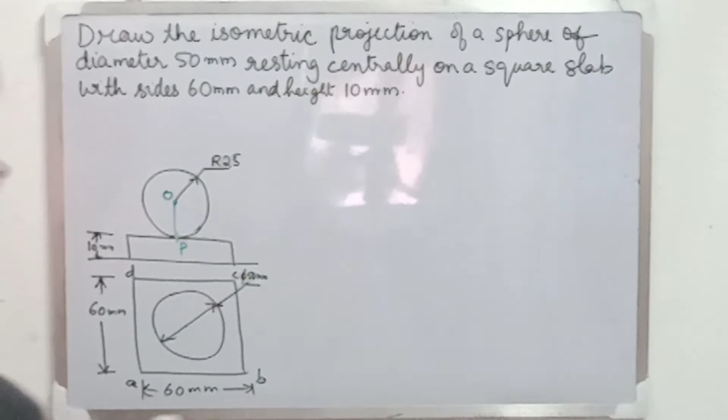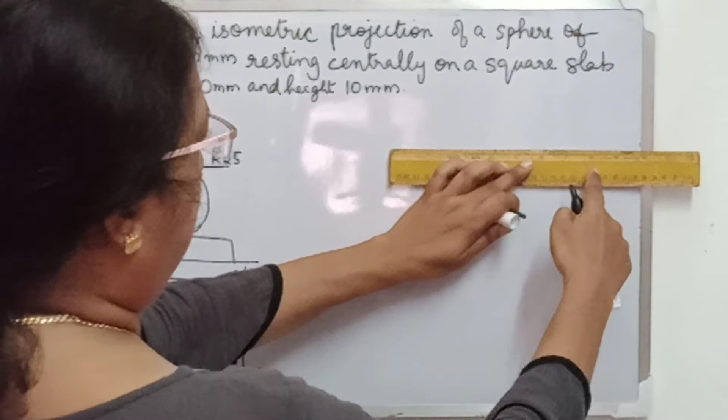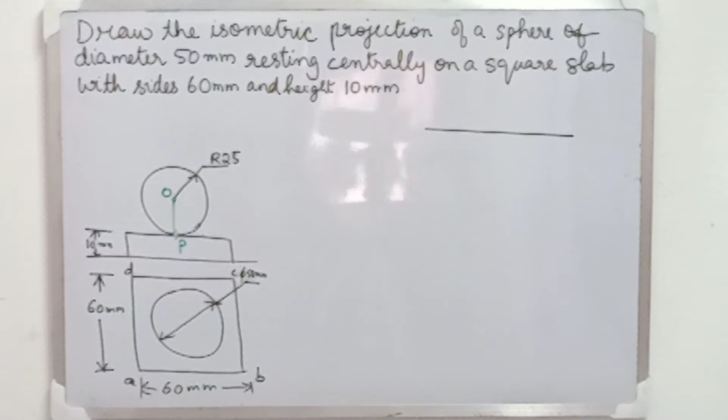The orthographic projections, that is the front view and the top view, are the same as in the previous problem. In isometric projection, the major difference is that the dimensions are drawn in isometric lengths. For that, we need to draw the isometric scale. First, I am drawing a horizontal line with the length equal to the largest dimension in the figure. So here it is 60 mm. 60 mm is the largest dimension in this problem. So the length of the line is 60 mm and I am going to mark here 60 mm.

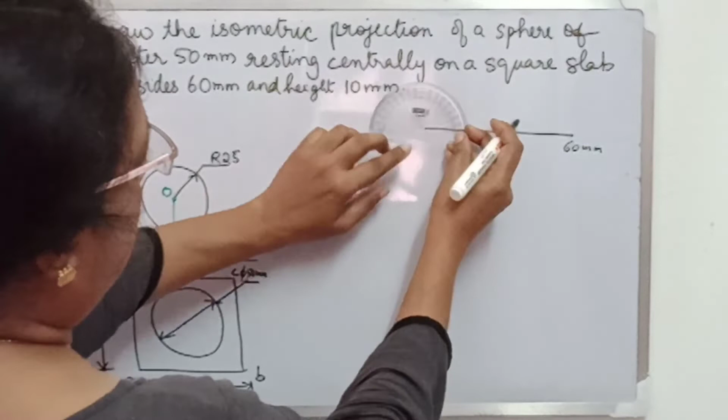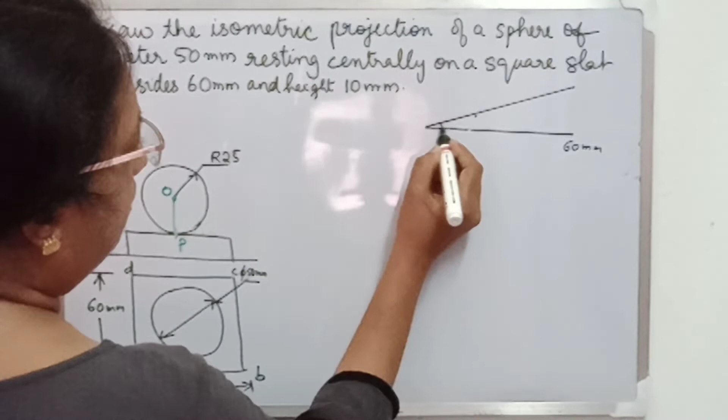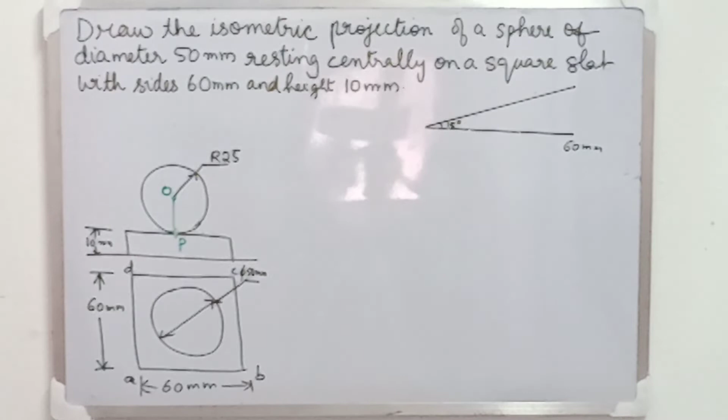Next we need to draw an inclined line at 15 degree inclination with this line. So I am marking 15 degrees using a protractor and using a scale I am drawing this line at an angle 15 degree with the horizontal. Next we need to draw an inclined line at 45 degree from the rightmost end. So this line will cut the line at 15 degree at some point.

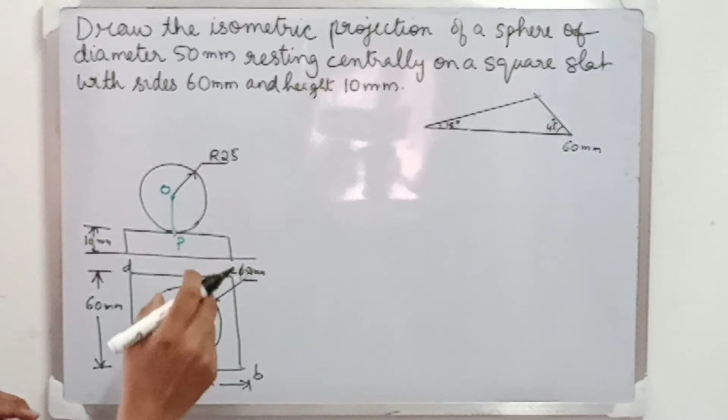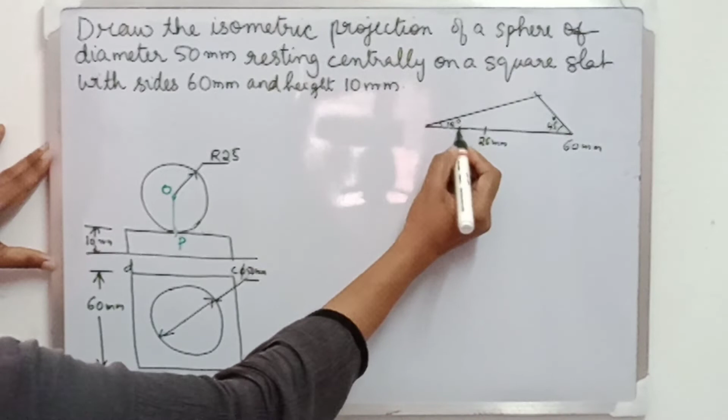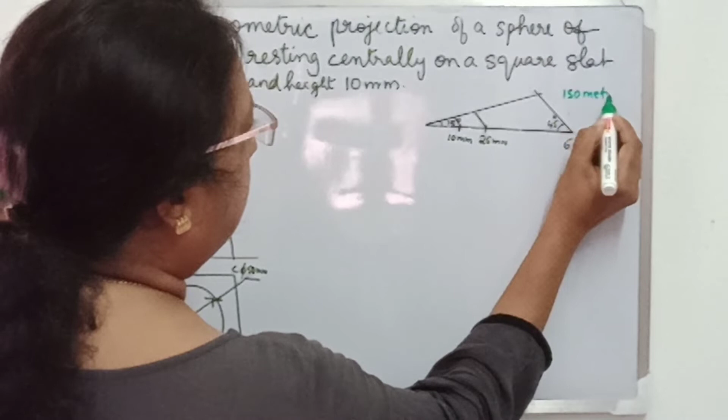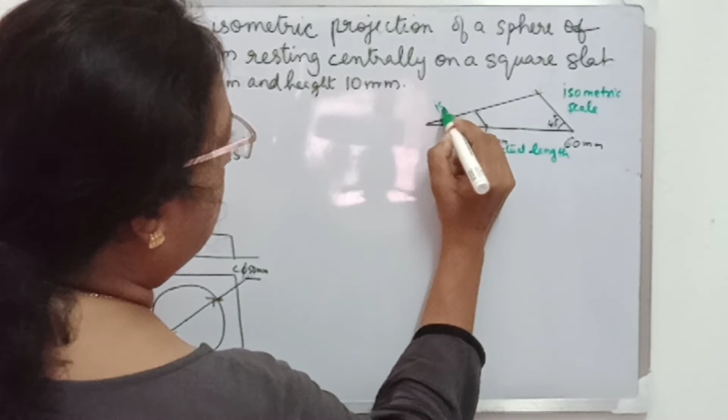Now let us mark the other important dimensions on this actual length line, that is 25 mm radius. I am marking it on the actual length line, and another important length is 10 mm, that also I am marking on the actual length line. Next, draw parallel lines to this 45 degree inclined line from these 2 points, that is 10 mm and 25 mm points. So now we have marked the isometric lengths of all the important dimensions on this isometric scale. On this horizontal line, we have marked the actual length or true length, and on the 15 degree inclined line, we get the isometric lengths.

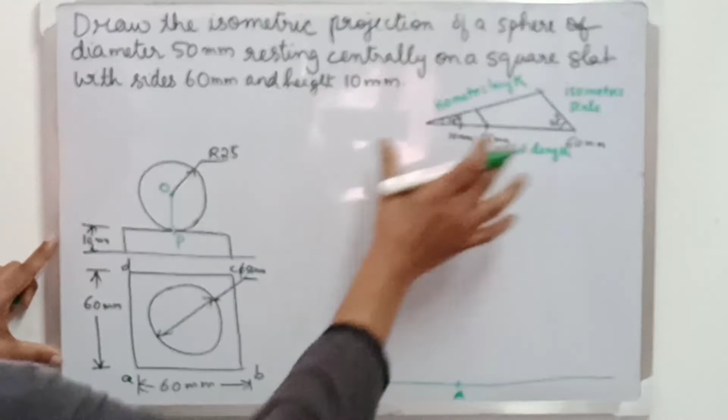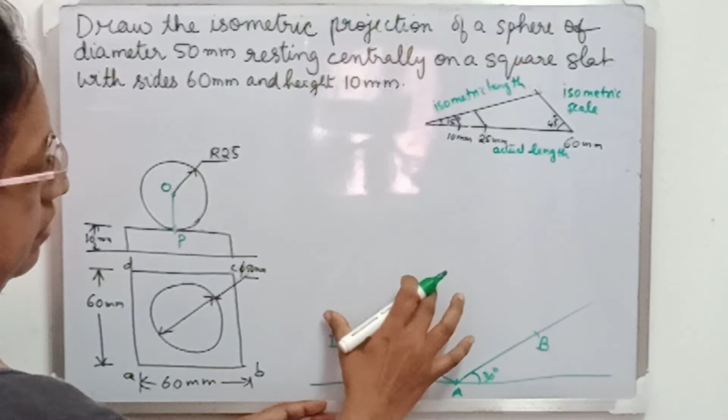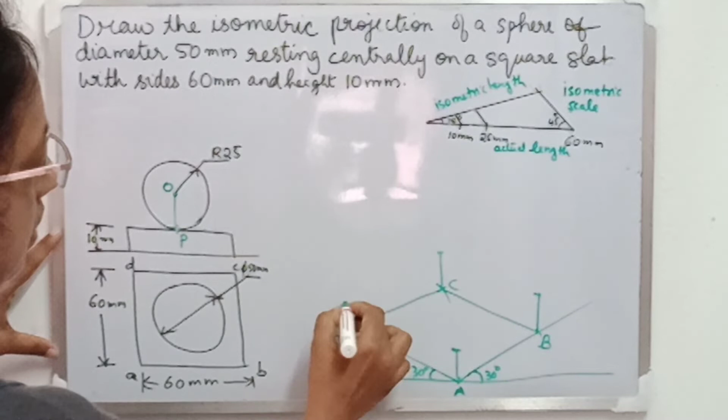First, drawing the isometric projection of the square slab by taking the isometric length of 60 mm and marking it on the two lines inclined at 30 degree with the horizontal. So I have marked B and D, and from that marked the point C also. Next, to mark the height of the slab, take the isometric length of 10 mm and draw vertical lines from points A, B, C and D. Then join all these points, we get the isometric view of the slab. I have erased all the hidden edges.

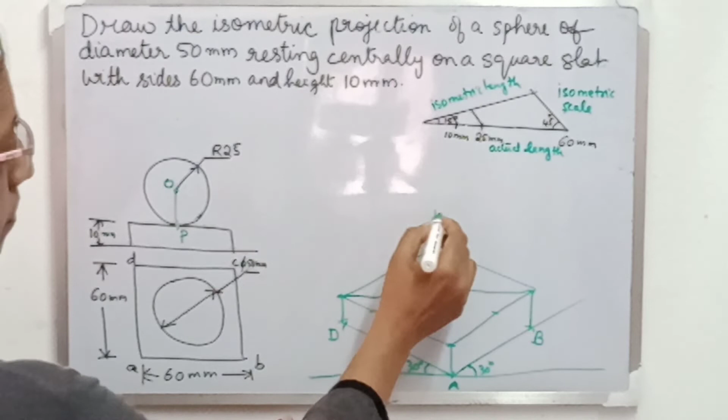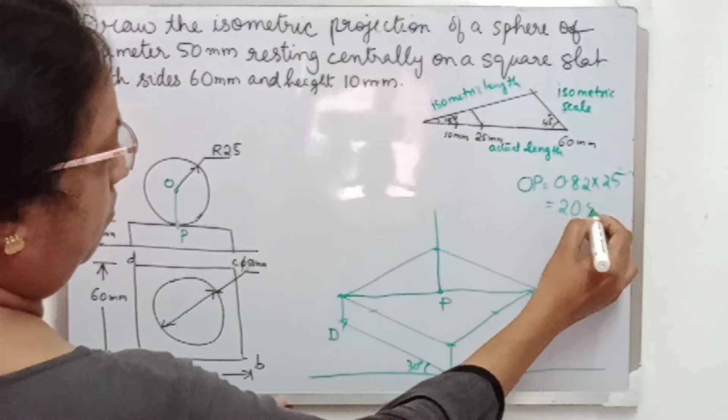Next, to draw the sphere, first let us locate the point P. Point P will be lying on the midpoint of this longest diagonal. Next, we need to draw the line OP to mark the center of the sphere O here. Now here the length of OP will be equal to 0.82 into the true radius, that is 25 mm, and it will be approximately 20.5 mm. So let us mark 20.5 mm on the line from P, and that point will be O.

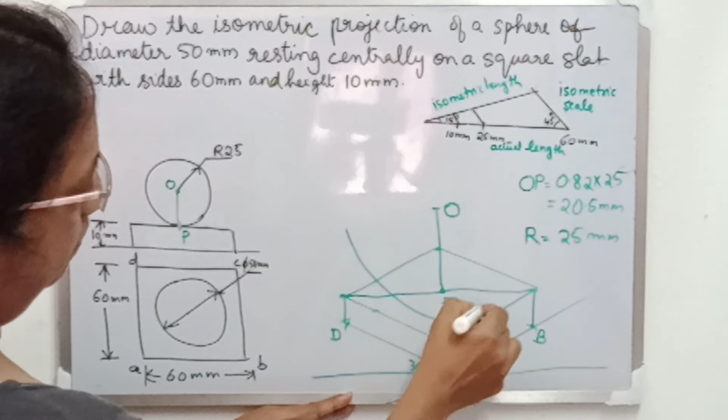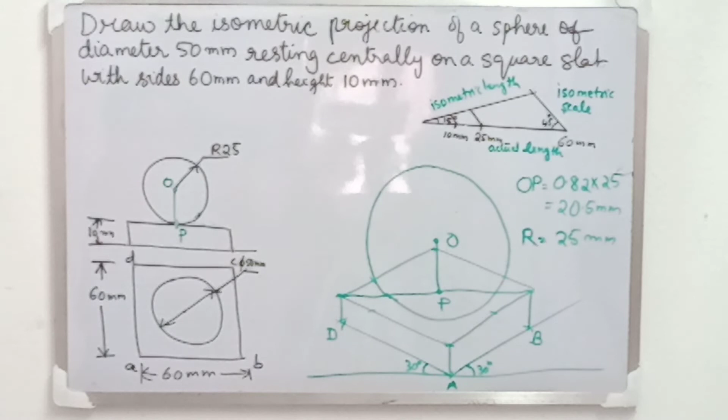Next, we need to draw the isometric view of the sphere. For that, the radius should be taken as 25 mm. So with O as center and capital R, that is 25 mm as radius, I am going to draw a circle. That will be the isometric view of the sphere. Here this is slightly distorted, so I am redrawing the circle, and now it looks almost okay. So this is the isometric projection of a sphere resting on a square slab.

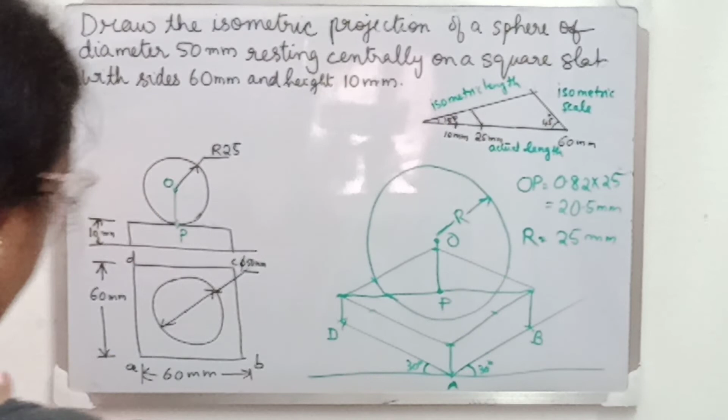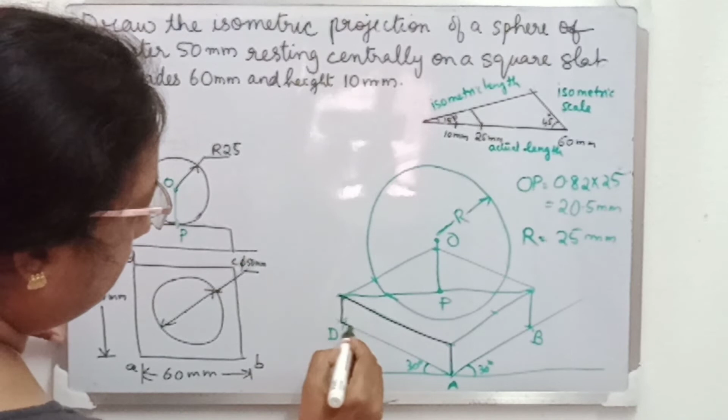Come back to the isometric view or isometric drawing of the same problem. The isometric projection will be slightly smaller in size, that is 82% of what we saw in the isometric view. So I am darkening the visible edges and curves using a black marker. So this will be the final image of the isometric projection of a sphere resting centrally on a square slab.